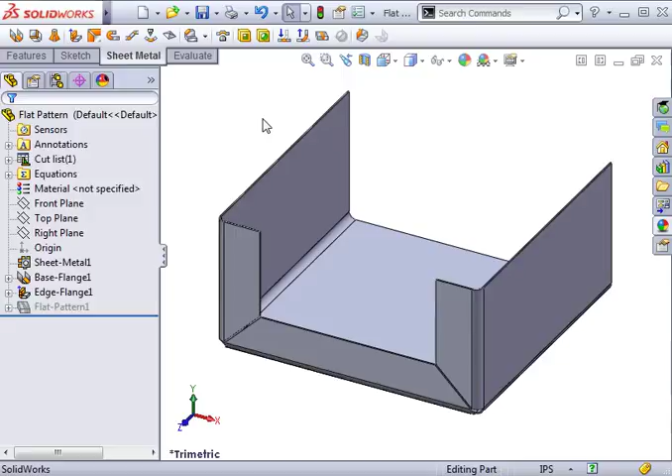In this lesson, we'll be taking a look at the flat pattern feature and its options. Like any other feature, I'll click on it and select Edit Feature to access the Flat Pattern Property Manager. The first section is where you specify the fixed face.

The fixed face is the face of your sheet metal part that remains stationary while the other faces bend around it. To change the fixed face, you simply select a face in the graphics window while the fixed face field is active. Let's take a look at the next section of the Flat Pattern Property Manager.

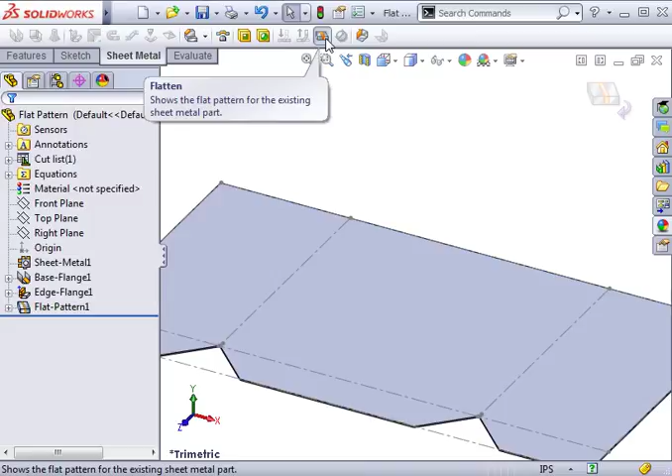It's the checkbox labeled Merge Faces. This will merge all faces that are planar and coincident in the flattened state. Let's look at the part with this option selected. I'll first get out of this feature and then click the Flatten button from the sheet metal toolbar. Notice there are no edges where the bends meet. The sheet metal part is all one face.

Now I'll go back into the Flat Pattern feature and uncheck the Merge Faces option and then click OK. Now, in the flattened state of this part, you can see the faces of the bends.

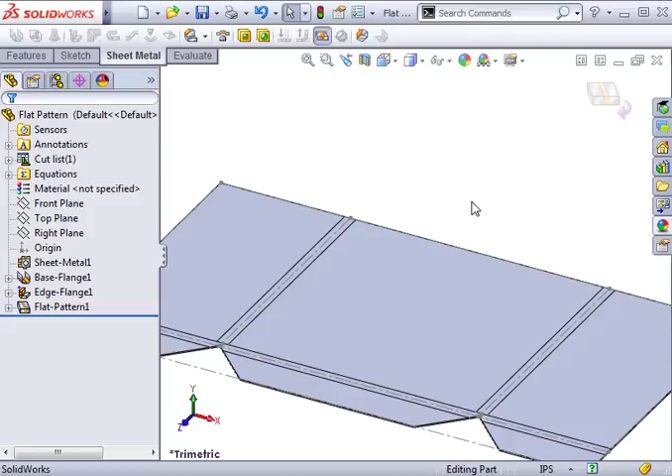The next option to explore is the Simplify Bends option. This option controls how curves in the bend region are treated. With Simplify Bends selected, SOLIDWORKS will make linear edges out of curves in the bend region. Now let's take a look at a different part. This part has a cut that goes across the bend regions, creating a curved edge in those regions.

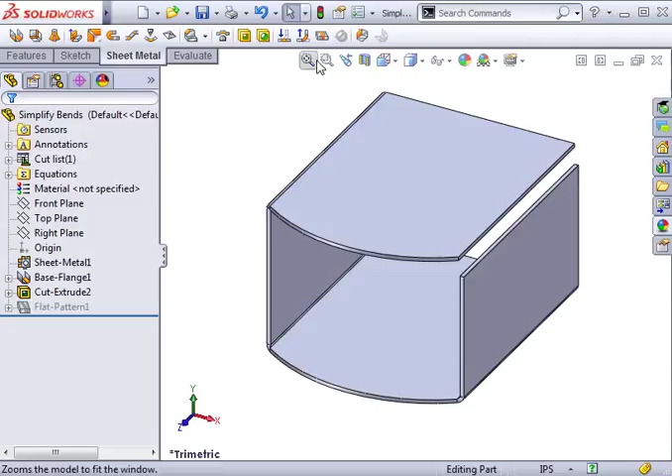The default is set to Simplify Bends, as you can see when I edit the Flat Pattern feature. I'll unselect it and click OK. Now, when I flatten the part, the edge in this bend region is curved. I'll go back into the feature and check the Simplify Bends option. Now, when I look at the flattened part, the edge in the bend region is a linear edge that's easier to manufacture.

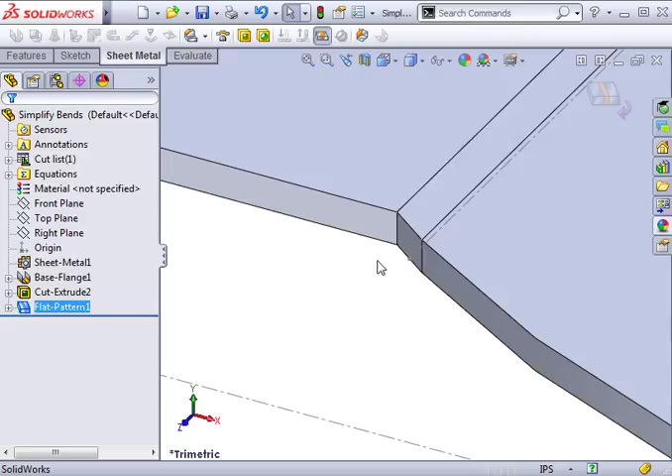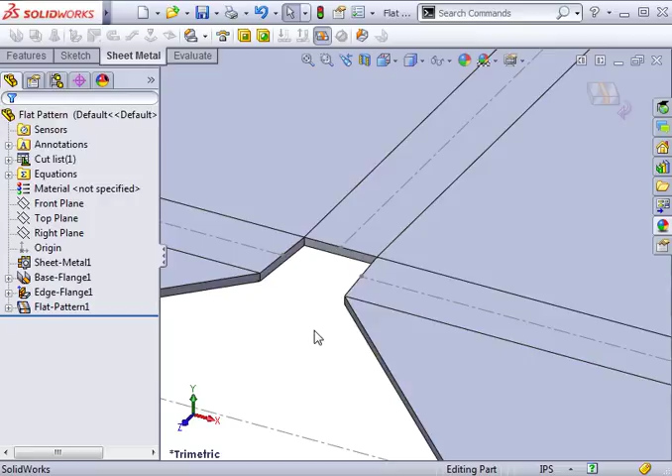The next option in the Flat Pattern feature is the Corner Treatment checkbox. This controls how SOLIDWORKS displays the corners where bends meet. With this option checked, SOLIDWORKS adds corner treatment to all the corners to create a clean, flattened sheet metal part that's correct for manufacturing. If I uncheck this option and then flatten the part, you can see that the corners where the bends meet do not have corner treatment applied and do not meet correctly.

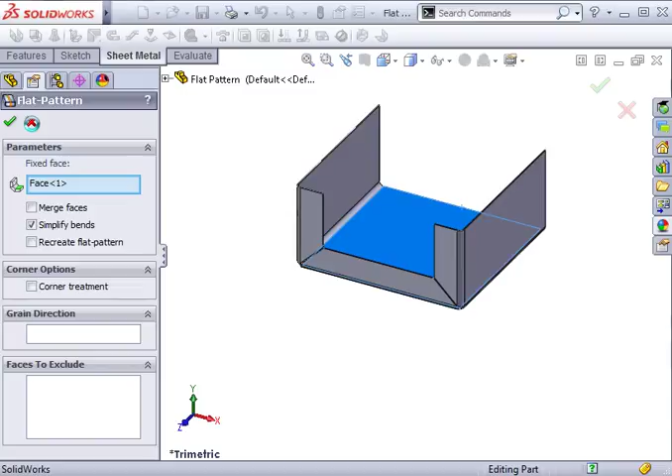I'll edit the flat pattern once again. In the grain direction box, I can select an edge or line in the graphics area to specify which direction the grain runs on the sheet metal stock. I also have the ability to exclude faces from the flat pattern. Now let me switch to a different part to show you what this option does.

Here, I have a table made using sheet metal features. Notice I've created some non-sheet metal features as well, near the bottom of the table legs to give the design a little extra support, making this a multi-body part. However, since these aren't bends, they could cause some problems when flattening the sheet metal part. Let's take a look at what happens.

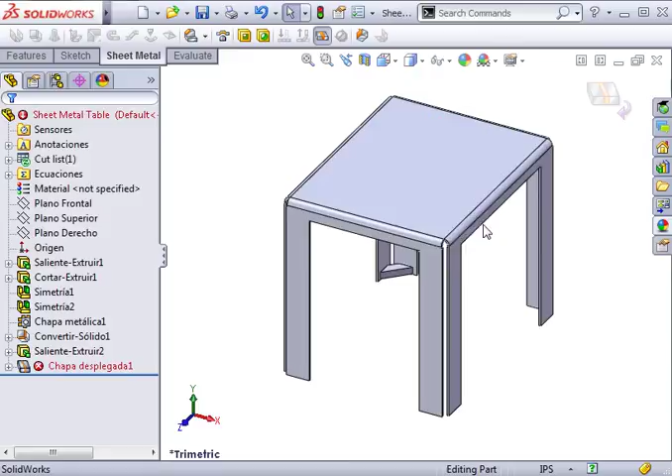I'll switch over to the flat pattern, and when I do, you can see that I do indeed get an error message. To fix the error, I'll click the Flat Pattern feature in the Feature Manager tree and select Edit Feature. Now notice at the bottom there's a Faces to Exclude selection box. I'll click inside the box to activate it, and now I can select each of the faces of that extrude feature that's causing the problems.

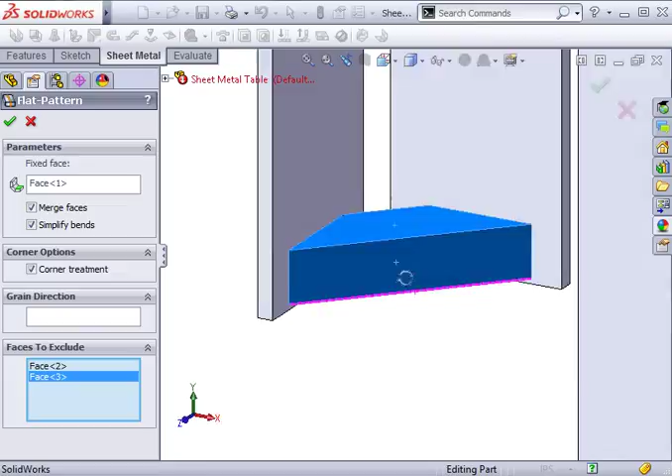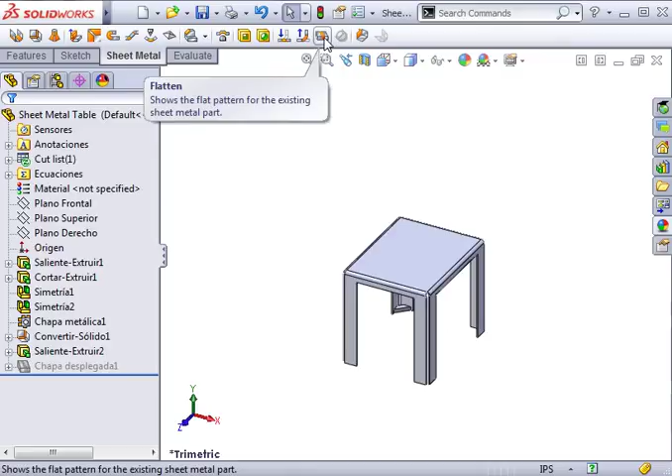Once I have all the faces selected, I'll click the green check. And you can see SOLIDWORKS can now flatten the part without any problems, since those faces are now no longer considered. And when you switch back to the bent state, you can see they come right back without the need to unsuppress anything.